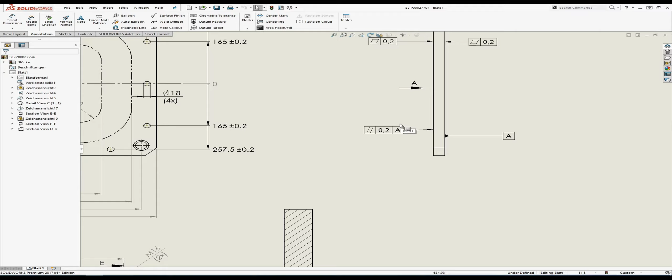Welcome back to the channel. This is going to be the first video of I don't know how many, to be honest, about things you need to know before going into interviews, things you should know mostly about drawings and tolerances and all the GD&T and all that shit.

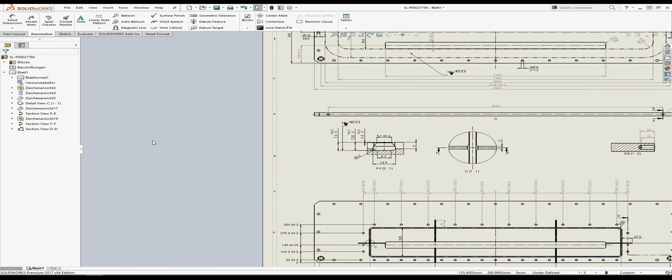Because, well, bit of a story time before we start. When I was looking for a job straight out of university, I ran into a few interviews where I had to interpret a drawing, or explain to the interviewer what the drawing was doing. And I noticed a lack of knowledge when it comes to tolerances and reading a drawing, because if you look at YouTube, no one really shows you how to read a drawing, what a drawing is. At the time, I looked at different channels and I couldn't find what it is, how to use it,

and the different standards. So this will be specifically for Germany, but the principles are the same. You're going to have slight differences from country to country. If you're in America, then good luck. You're working with Imperial and the callouts are a bit different. But all in all, it stays relatively the same. These are things you should know, and if you're competing for a job straight out of university, this could give you an edge.

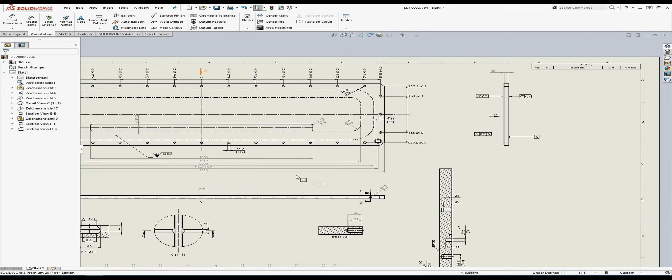Because I found out that even though I'm an engineer, I do a lot of technical drawing related activities. Also, disclaimer, I'm not a technical draftsman. I am a mechanical engineer, so I'm not fully up to date with all the norms and standards. But these are things I run into every day, and they are not complex, not super crazy. You just sort of have to know. It will help you if you know this.

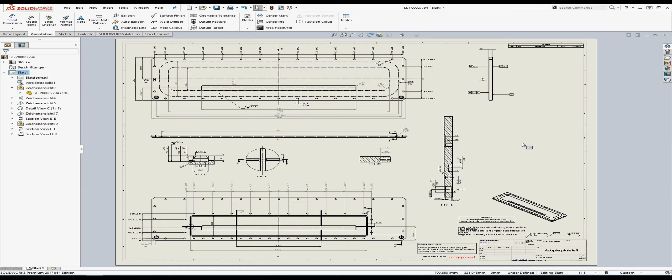Let's start with how I would approach a drawing. This plate comes from the vacuum industry, like vacuum cells for different processes, and we're going to have a bunch of specialty annotations and mostly standard, regular things you're going to see anyway. So usually we start with this view to see what it's like. It's a plate, sort of rectangular. It has a bunch of holes. It has a slit, not in the middle, but offset.

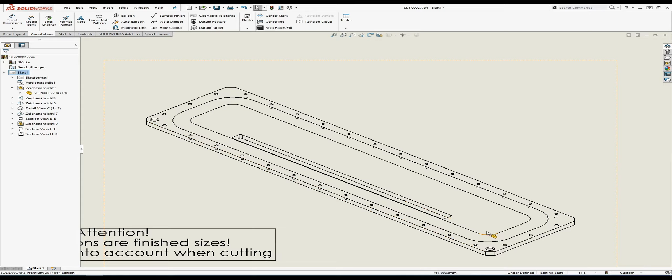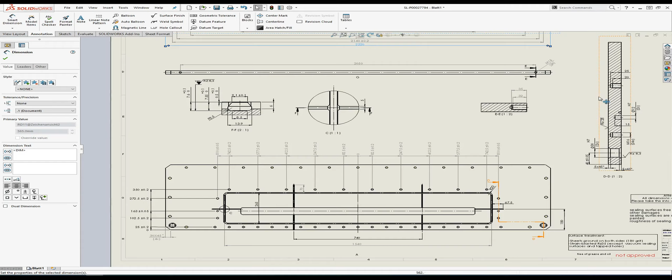So what do you do? The way I would start reading it, to get a feel for what it is: we have the main measurements, like width, length, and here you can find the thickness. Probably should be here, to be honest, but you can find it here. So it's a 30 millimeter thick plate, 2 meters long, half a meter wide. So it's pretty massive. At the bottom, you should be able to see that it weighs 272 kilos.

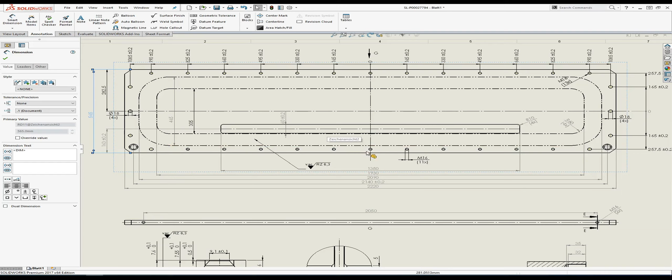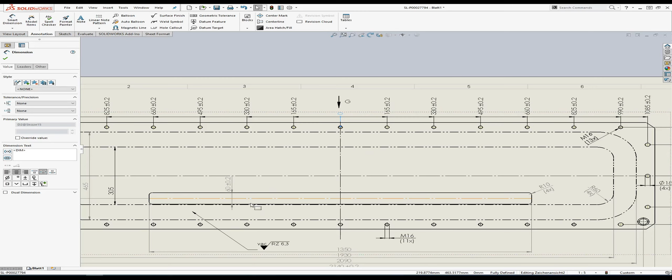Now, you have a bunch of holes here. It is best practice to put this dimension outside of where the material is, but you also don't want to intersect two lines, so I guess this is why it was put here. We are measuring from the middle for these holes, horizontal and vertical. This makes the job of whoever is going to CNC it a bit easier, maybe. Sometimes you can talk to the CNC person manufacturing it, and he will tell you what is better for him. Other times, you just need to fully define your part, and it's the manufacturer's problem, like a subcontractor, they need to figure it out.

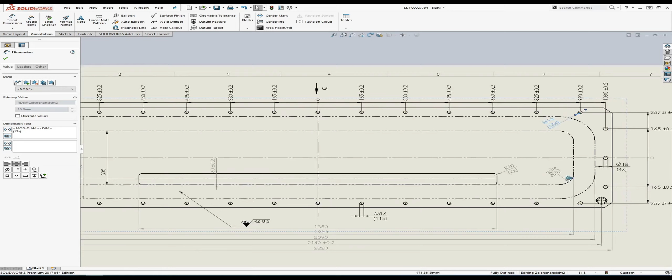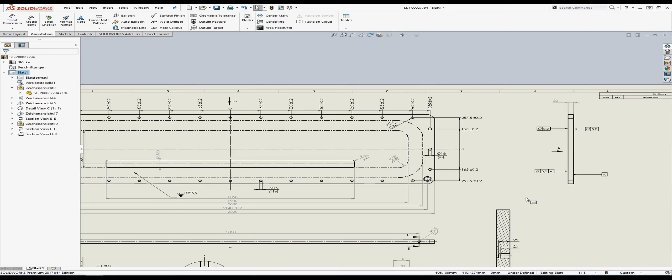We have these holes at these distances from the middle. This yellow, this is why I hate SolidWorks. This is the center line. You have holes at equal distances along it, 13 of them in this line, and then another 11. And these are 18 straight holes without threading. And this is the length and the width of the slot, and it is through the whole material. It's not a slot, say, 15 millimeters deep, which you would have to write in a different way. So we have this plate, these holes, and here 2 holes on the side.

They are in section D. Section D is over here, and you have this here: 2 times 30 millimeters diameter with a fit H7. I think I will do a video about fits at a later time. But yeah, this is a fit. It dictates how this hole interacts with the shaft that goes through it. That's what you need to know for now; you can look it up, or later on look at my video.

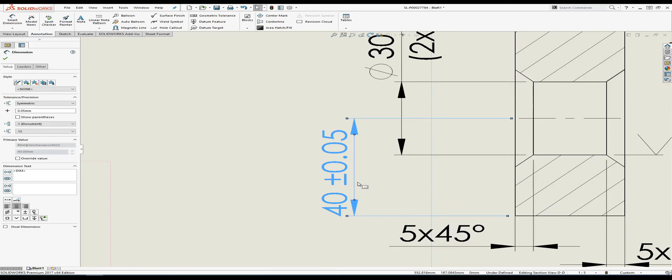This is the position of the hole with a tolerance. So it can be 40.05 from the bottom, or 39.95. This is the area, because no dimension is exact. You heard about it, but this is how it comes to be.

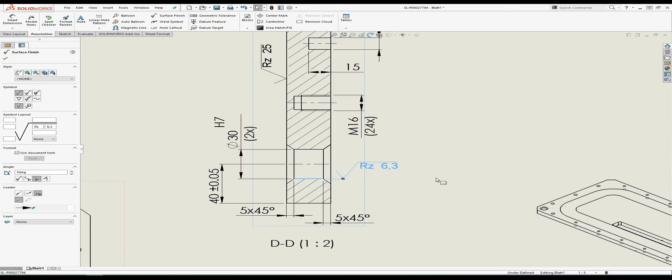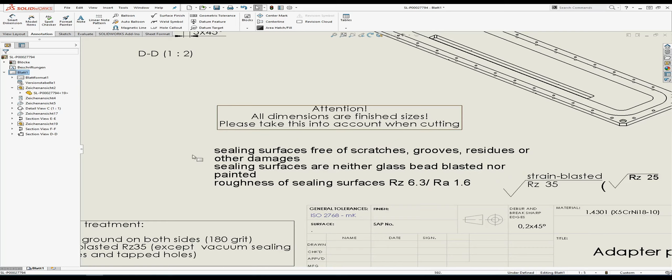This is a surface treatment. It needs to have a roughness of RZ 6.3. What it means you should know already. If not, you can go and search it, look up RZ and RA. You can also communicate information like this. This is a drawing I worked on a very long time ago. It tells you about the cleanliness of this thing and this surface, and basically everything that is interacting with vacuum.

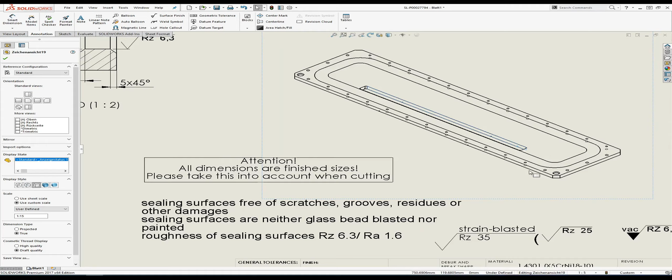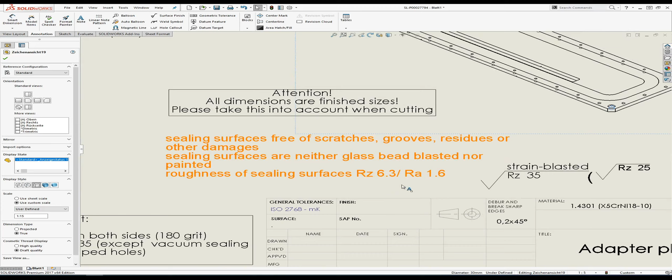To be honest, this doesn't need a 6.3, but the boss decided that it gets a 6.3. So this is for the surface treatment of the machining, like the roughness of the surface. Here I detached it now, and you can put it on top of this, but usually you drag it out so you have a line.

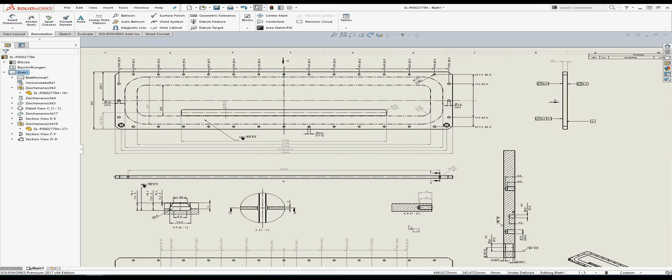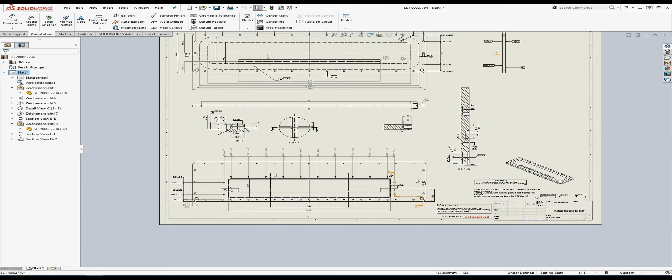Now, what else do we have? Usually when you get a drawing, this is an A0 sheet, so in reality it's way bigger. Actually, it's an A1. So we have the holes, and on the other side, if you cut it like this, D, and you're looking through the material, you have these holes. This is the back side. So if this is the front side and this is the back side, although in reality this is the back side, this is the front side.

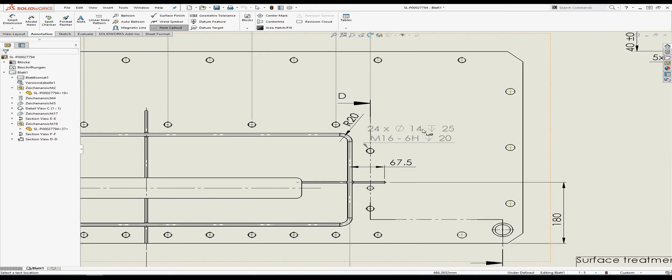So here you have, for example, these 24 M16 holes, and they are here. I'm guessing these; I don't actually know if that's correct, because it was all done by hand. So yeah, 24 M16s, hole callout later. Here you have another hole that's 15 millimeters deep, 12 in diameter. You have 2 of those, and they are H7 in the fit.

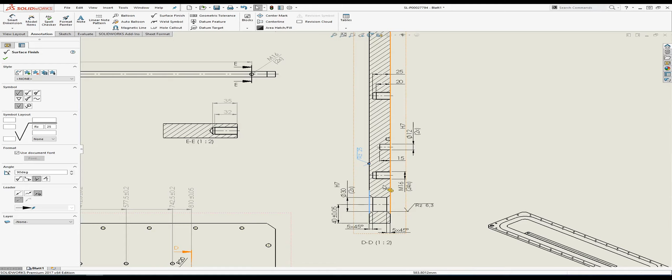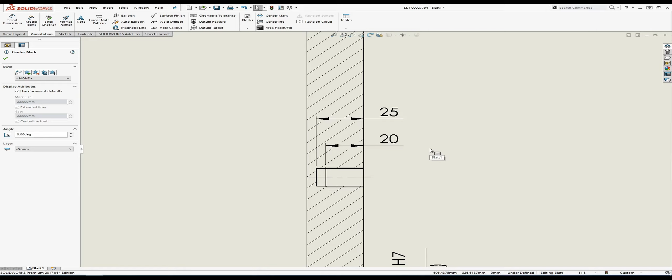If we are in the section here, DD, the back side should be machined to RZ25, which is a roughness definition. And you have this thing here that's 25. This can't really be, I think. Those are these, right? Anyway, there should be like a triangle here, because this hole is really hard to make. It can be made, it's just expensive. And 25 millimeters deep, 20 millimeters for the threading.

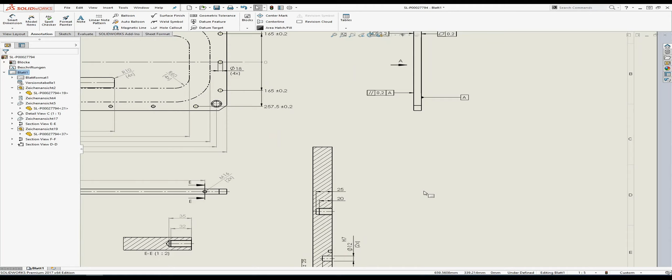And what's missing here is that it's M16. It's probably the rest of these. Normally you would put this over there, and you don't put one dimension here and one dimension there, because it confuses people who read it later.

What else? This is the plate from the side. We are in first angle, so this side is here now, like we are flipping it 90 degrees. You can see that we put a datum here. We are calling this plane A, and we are telling A that it needs to be planar up to 0.2 millimeters, meaning any 2 points on this plane should not differ in height from the zero theoretical dimension by 0.2. It could be 0.2 upwards or 0.2 downwards, but from the arbitrary zero we define, we shouldn't differ by more than 0.2.

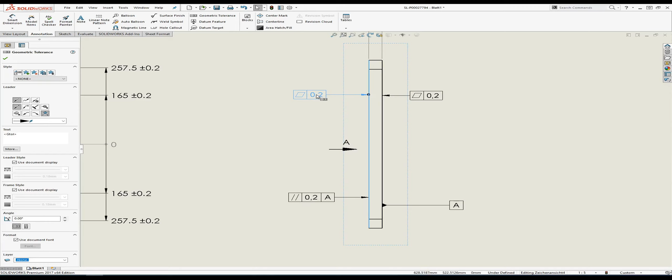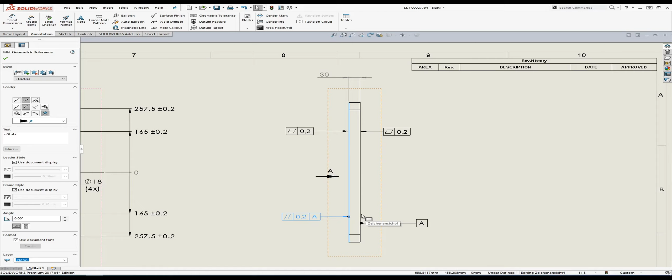It is parallel up to 0.2 millimeters to A. You have the reference here. Now, I am quite sure that this is redundant, like it's overdefined, because if we define A as planar to 0.2 from an arbitrary zero, and then we define that this is parallel up to 0.2 millimeters to A, then this should already be there.

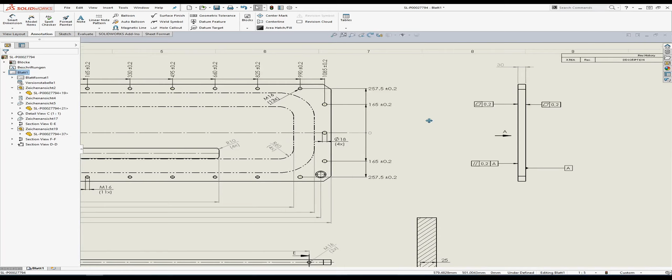But sometimes you would have things that, from a theoretical viewpoint, are redundant, but it makes it easier on the people actually working on the piece, who are most probably not engineers, and it helps them understand what you are trying to say. The one and only reason we have drawings is to communicate what we mean. That's it. So if you can do something to be extra sure that the other side understands it, and it is fully defined and anyone who looks at it will understand, then good.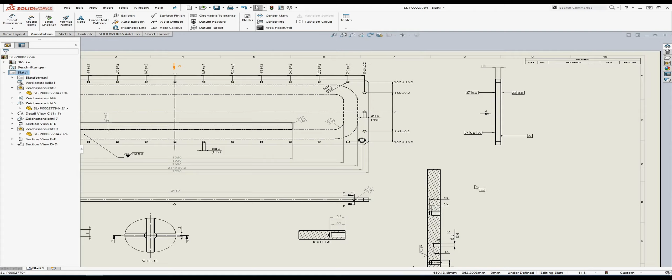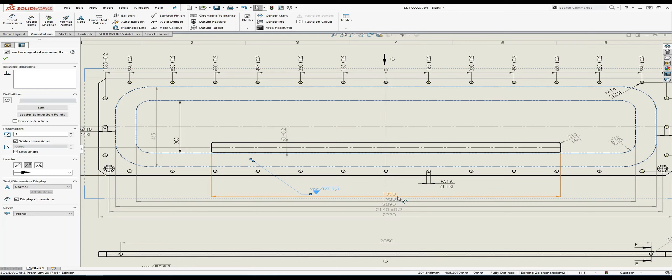That's all we need. Now, this is something you will probably not see: these broken lines. This basically means that this area here, which we have on the length, so the big sides are 2090 and small sides are 1930 millimeters, and we have here the other, the width. So it's basically a projected area of where this part interacts with another part, and it needs to be machined to Rz 6.3.

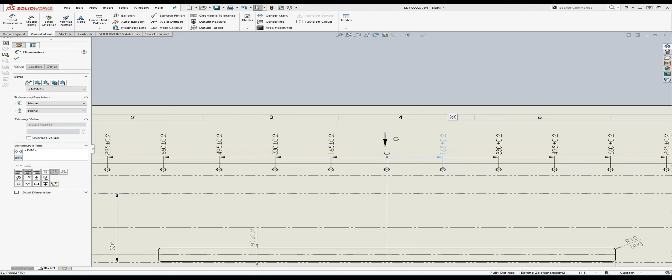Now this Z needs to be small because that's how it works. It's not a big Z, it's a small Z. And another thing I want to talk about is these tolerances. You have all these, 165, 330, 495, 660, and all of them are plus minus 0.2, which is good. This is fair enough. This is correct. You want each of them to be plus minus 0.2 to the middle, not to one another.

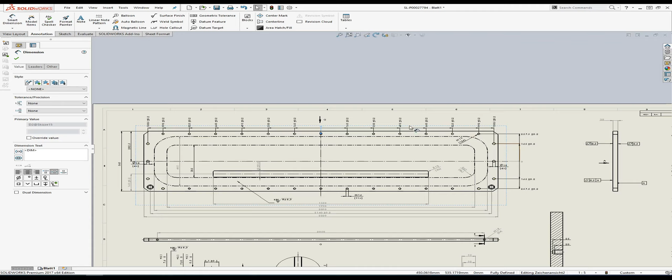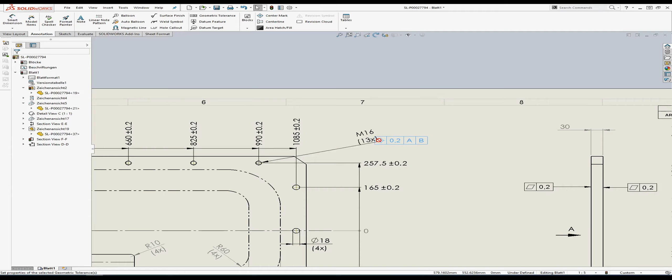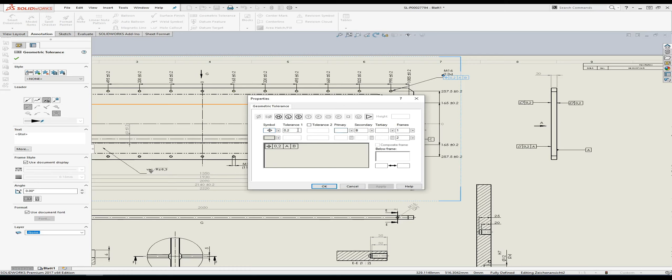So already good. The way I would do this right now is, do we have a section of these? No, but still, you can take this guy, and you can tell it that their position is 0.2 A, B. And then you tell this thing that it relates to that one, but then you need to also define a B surface or plane like this. So basically, let's change this to B and C. So if you have B and C, you are 0.2 millimeters in reference to each of these planes, and then you can get rid of all of these plus minus 0.2, which is not that bad.

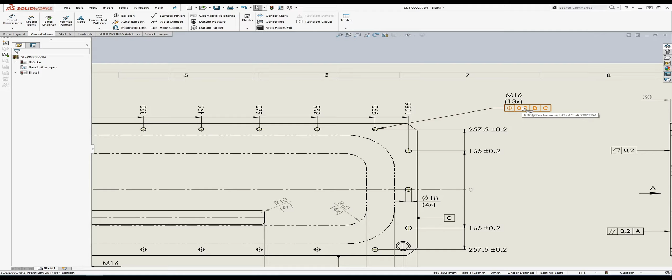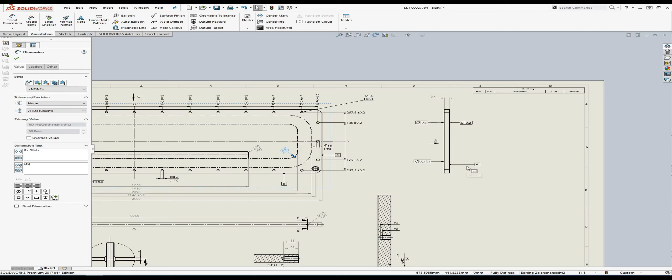Let's tell it none. Yeah, so that would be equivalent, and then you have less crap on top of the drawing, and it doesn't look so packed with everything. So that's something you can do. There are different ways to communicate the same idea. It usually depends on the company you are working at and where you are and what they have been doing until now, even though it might not be the most correct thing. You have to know.

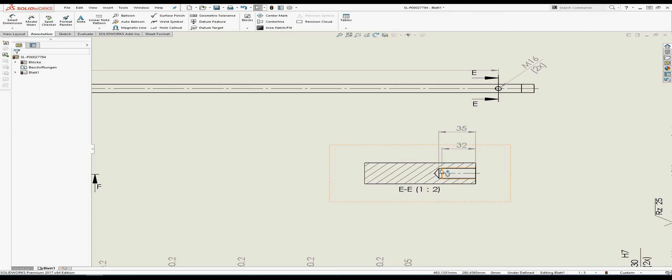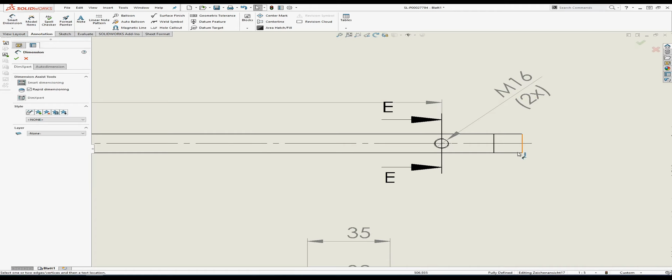Now, let's look at this thing. This is an M16 hole. We have two of them, one here, one there, and they are 35 millimeters deep for the drilling and then 32 millimeters deep for the threading. This is to lift this part because it's 270 kilos, so no one's gonna lift it by hand. And this is for the crane. And you have this center line, meaning this hole sits on the center, 15 from top, 15 from the bottom.

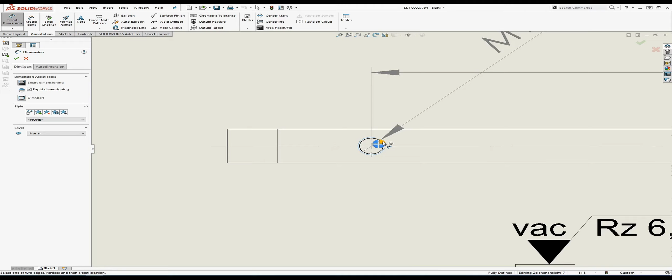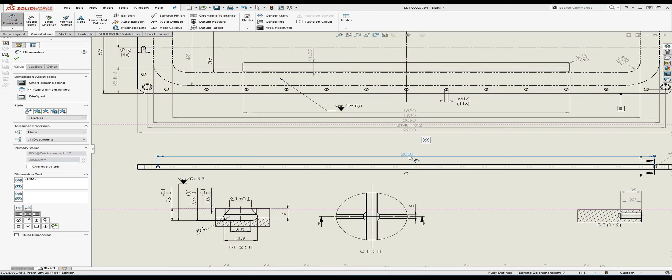And you have 2050 millimeters between them. Let's pretend it's not fully defined. This is 85 from this side, right? And now it is fully defined. And we can see that this is also 85. So basically, you don't need to put a center line on this kind of view, but let's say put a center line in the middle, and then this is 2050 around the center. That's fair. That works. It's okay. It's legal. What else do we have?

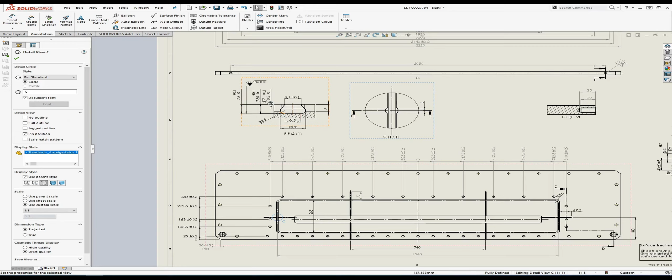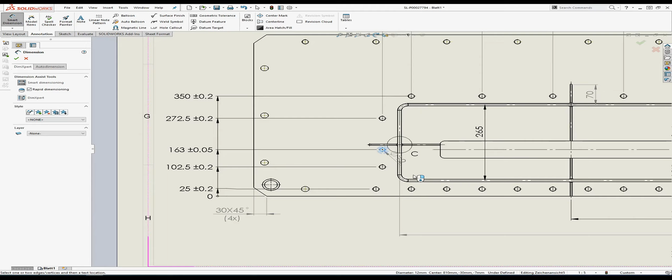So on this, we said that this is the back side. This is the front side, right? Here we have the seal. So let's look at C. We have F. This is F. Okay. So detail C is over here. We are enlarging this and we are putting it here. Also, you might notice that here we have 005 and here we have 02. These are two different series of holes. And you have to pay attention to these things because you could say, oh yeah, everything is 02, but no, not everything is 02. You have 005.

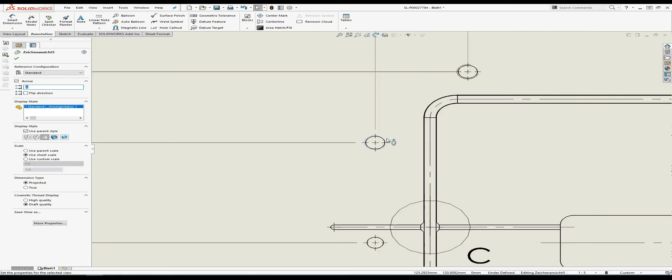Weirdly enough, this hole has 005 on the horizontal and 02 on the vertical, but whatever, at this point. So, detail C. We have here a channel. This is from the top, this is a cross section. This is a specialized vacuum, let's call it channel. It is for the seal of the vacuum. This is a rubber-based seal as opposed to a metal-based seal.

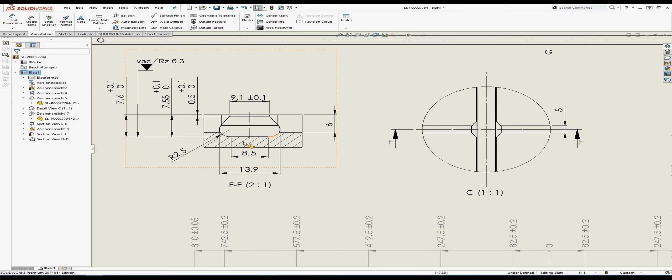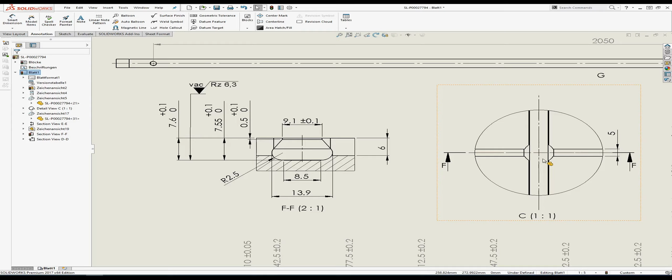And basically this describes the drill bit, the drill head. We have these dimensions that the machinist has to be within, but they are because of the drill bit. So usually it will be like that as long as he keeps his center along this path. This path is defined here at 1640 and with the other one 265. And very important, this 180 is the middle of this, I think.

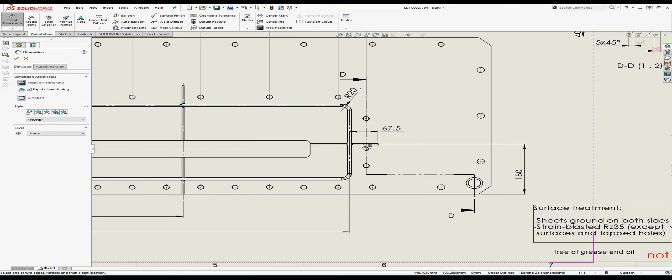Let's see. 140, 125, no. So I think this is underdefined actually. You need this 55 and 265 and the length in order to be able to say where it is exactly. Right now it's floating. It doesn't have a definite position.

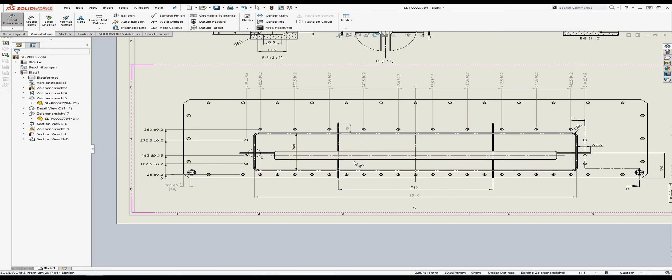Right? Am I missing something? This is 70. Yeah. So basically this is missing. You see, there are problems with... You can always improve drawings. This is something that happens. Anyway, so here we have the center line, and it correlates to this center line.

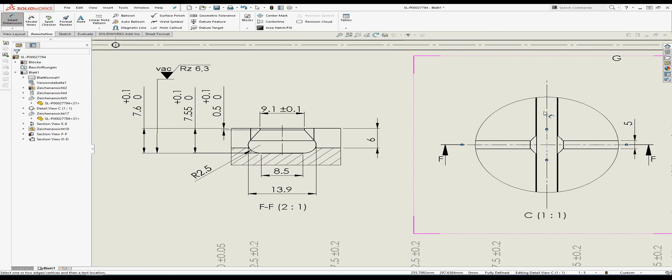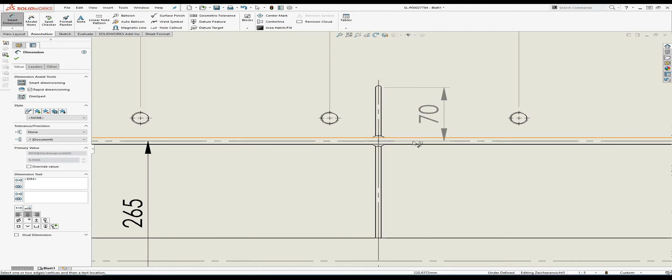This thing has a depth of 6. This depth of 6 is actually this channel here, and it is there for technical reasons, let's say. Basically, it's so that air has somewhere to go, because here you have the seal, the rubber seal, and basically if you don't have these, air gets trapped here, and it's less than ideal.

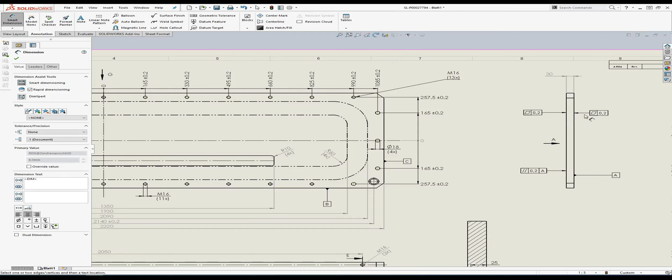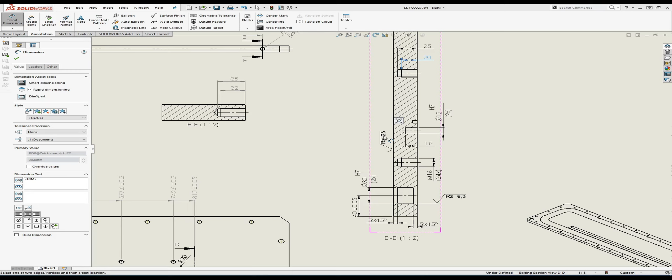But yeah, that probably doesn't interest you at all, so we can continue to more things, although this video is already quite long. So we had datums, we had tolerances, we had planarity, we had here positions of holes, we had a bit how to call out a hole, depths, ends of holes, we had surface treatment or surface machining, we had a bit of fits.

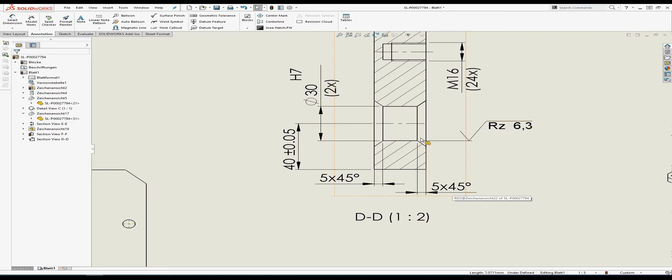This is also called a Fase in German. Let's say it's a Fase, it's a chamfer. Here you can define it as 5 times 45 degrees. That means the depth is 5 and this is 45 degrees. You can also do it with other angles, but I would usually define the height and length if it's not 45 degrees. Like right now it's 5 towards here and 5 towards there. Anything that's not that, I would define specifically.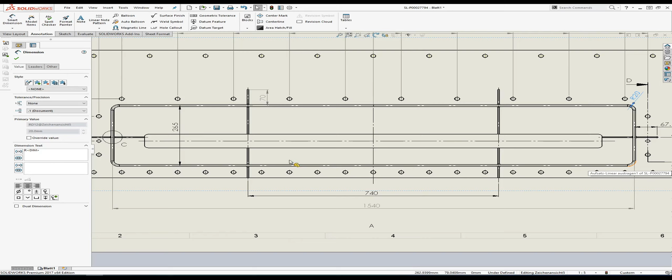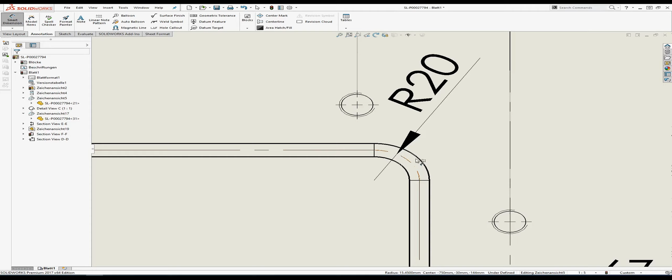What else do we have here? Radius, this is 20. So for anyone who worked with drawings, it's obvious that this is 20, this is 20, this is 20. So times 4. Also notice this defines the center line, because we don't care about this. Our channel here, this thing is defined around the center line. So we care about this. Whoever programs the CNC machine needs to follow this path. We don't care about the rest. It is a derivative of this. You don't define it over the sides.

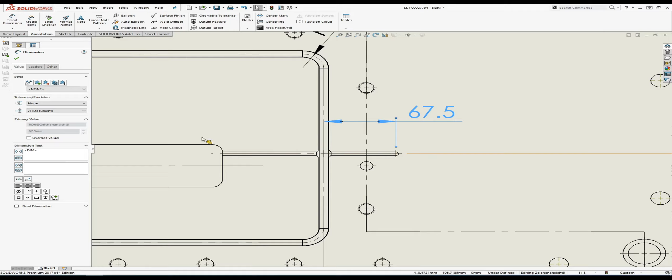So you know that these are 6 deep and they are 67.5 long here. They were 70 over there. And how wide are they? It's a very good question. I don't think it's defined. It is. It's 5. Yeah, okay, so that's fully defined.

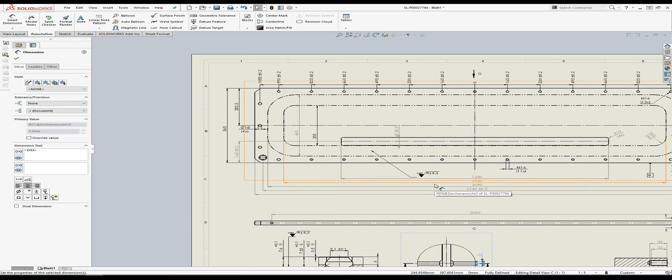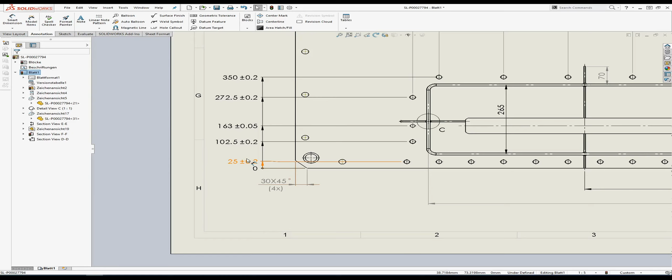You see, this video also shows you, when you have a drawing in front of you, it's not personal, but you have to go and find where did you fuck up? Where is the fuck up? Where did you forget something? Where is something missing? Because when something is missing, whoever is manufacturing this might ask you, hey, what did you mean here? Or they might do whatever they think. And then you get something you didn't want.

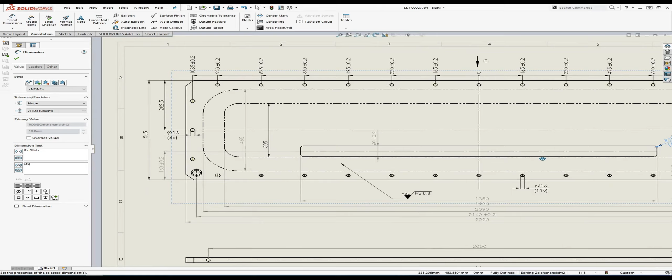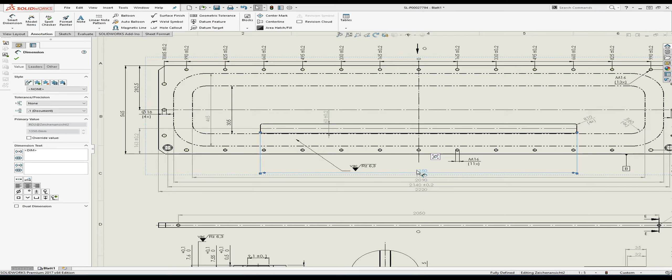You have here 4 times, so this is 30 times 45 degrees. This is 180 from the bottom. What else? Is this one defined? Yeah, here you go. This is 163 plus minus 0.05, because it is very important for this slit to not move too much up and down. Left and right it's okay because there's enough clearance, but up and down, this interacts with another part, which interacts with another part, which interacts with another part, and they have to be level with one another.

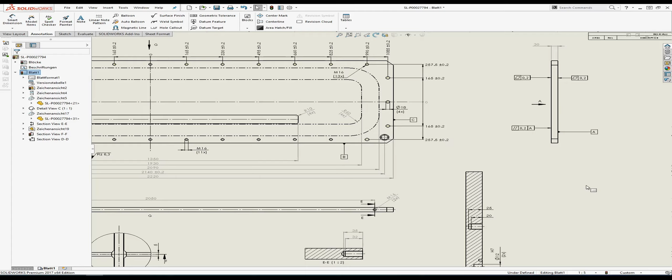Anyway, I will leave it at this, and I hope this helps anyone. I will do another few videos about different parts, maybe less complex, maybe more complex. I want to show different types of tolerances and datums and weird things you're going to see on drawings. I'm going to show what is bad, what is good, what is smart, what is not, and so on.

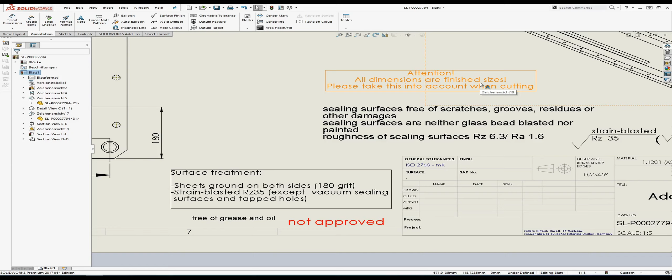Yeah, actually, this is super important here. So, I hate this notice. I hate this thing that they write. Attention, all dimensions are finished sizes. Please take this into account when cutting. Because, of course, I am giving a finished part. All these numbers are finished. I don't care what happens.

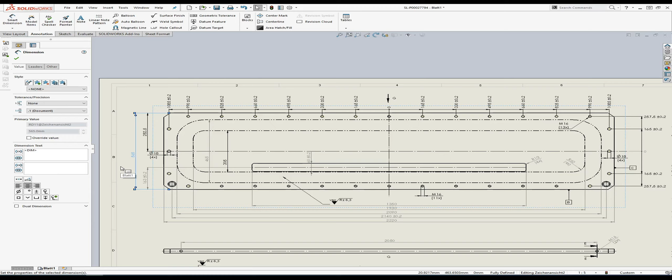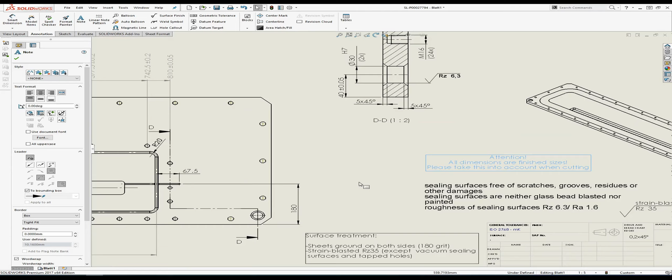I don't care what you do. I don't care if you take 5 meters times 20 meters, you can do whatever the hell you want. I don't give a fuck. I ordered this. Whatever happens to the raw material, I don't care. This is meaningless. Should be meaningless. But they wrote it because they had problems with whoever was manufacturing this, because for some reason they decide to be dumbasses. So yeah, anyway, this concludes it.